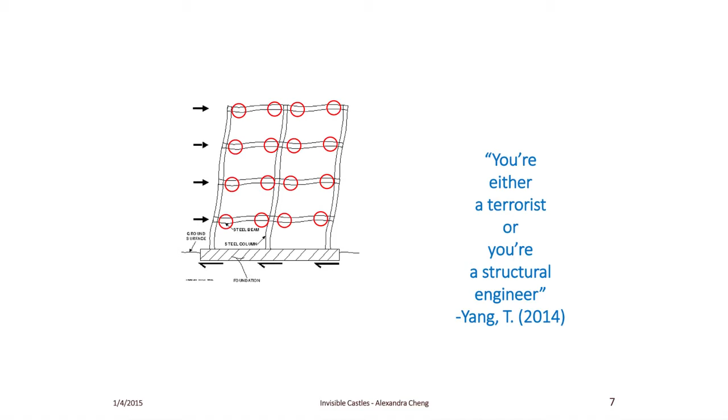So again, I say I usually try to make sure buildings don't fall down, but that's not actually what I do. I may or may not have written that. I actually design buildings to fall down, but at a very certain point. This is a professor of ours. He asked us to point out the weakest points in the structure, and we all pointed at the red circles, and he's like, good job, you're either a terrorist or a structural engineer. Because you have to design the building to be weak at certain locations.

And the reason why we do that, especially in the seismic zone, is because when the earthquake comes, that's quite a bit of force hitting so much mass. Or it's a lot of mass moving, so it's a lot of force. And you want the building to move just enough that it won't kill everyone, but not so much that it falls over. Because if it's too rigid, it crushes people, and if it's not rigid enough, it just kind of flops. But anyway, moving on.

When I was an undergrad, this is what I thought engineering was, which is a lot of equations trying to describe what's going on with a force. I kind of miss that because I could see it. Nowadays, I do more of this stuff, which is a lot of clicking on a screen and trying to make certain lines look like other lines and produce different numbers. And it's really odd to me because it's coming across now more as an art project in this sense. It's more visual. You're not yourself doing a lot of number work. You miss that. But again, I have an arts degree.

Then when I left architecture, I had a brief semester of going, what am I doing with my life? So I took engineering and art classes again. And I had to study for my advanced concrete design final. And I thought, oh, I have to do an art project for my final. Also, I might as well kill two birds with one stone. And so I did a fake concrete column out of boxes. And I did all the design calculations on the outside.

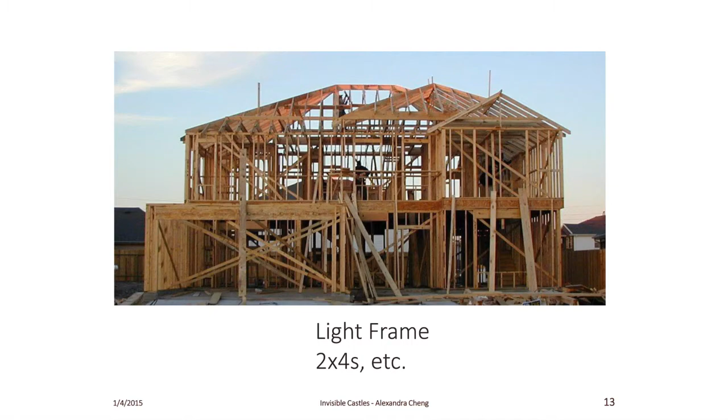And so when people ask what exactly I do, I say I'm a timber engineer. And usually when people think of timber engineering, they think of light frame housing, which is what most timber structures are in North America. These are all these little stick series, they're 2x4s, 2x6s, sometimes 2x10s. You may or may not have an engineered wood product in there, but they're going to be about this size, and I'll get to why they're only that size in a bit, but this is usually what people think of. This is not what I do.

There's also heavy frame, which is a good example. It's when you start to get a lot of Game of Thrones type sort of buildings. Green College itself is an example of heavy frame. That's when you're starting to get wood sections that are up to about 2 feet by 2 feet, say. They get pretty massive. But that's hard to do nowadays because it's hard to find trees of that quality that big. So usually you do see more light frame because it's easy to get little pieces like that. And you're seeing less and less of this because it is tougher to get sections that big. And usually when people do build like this, they want timber frame joinery, which is old-fashioned, it requires a lot of skill, and it takes a while, basically.

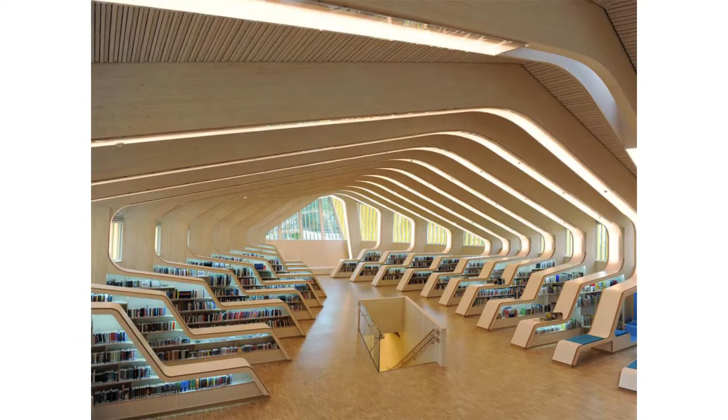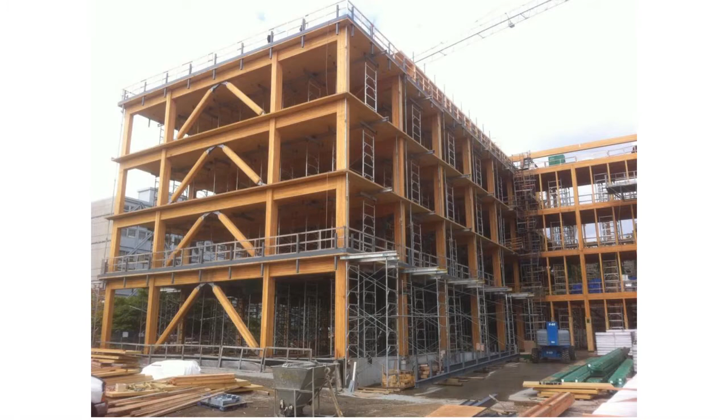This is mass timber. This is what I'm studying. All these curved arched ribs are going to be out of glulam, or nope, looks more like laminated veneer lumber. But you can shape them into interesting forms and carry huge amounts of load. And this is in the Earth Sciences building. That structure is timber members with steel connections, and it has a really nice back to it. It's starting to look more and more like a steel structure in its basic form. You have large members, and you've got cross-bracing for seismic loads.

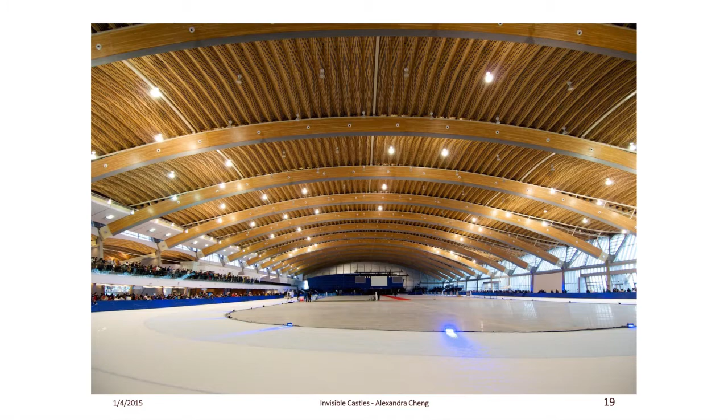And another good example is the Richmond Olympic Oval, which you may or may not have been to. I recommend going there because it is a very pretty structure. That's a 100-meter span. That is also a hybrid structure of timber and steel. And so what I'm doing is studying 3 different hybrid timber high-rises. They range from 30 stories to 40 stories. What I've got to do is take what the architects have proposed. These are all proposed by architects. And put them into a structural analysis program, see what kind of loads come out of it, and compare how much it costs to build them.

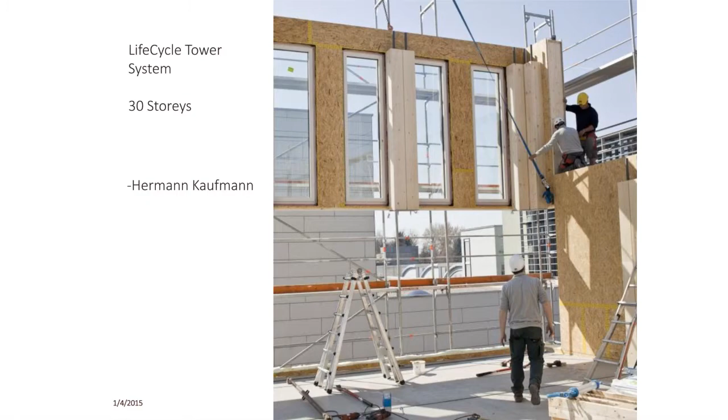Most of them rely on prefabrication, where you have the wall facades already assembled, you have your beams and columns more or less put together, and on-site you just screw them in together. And so compared to, say, a purely concrete structure, a mass timber high-rise will take about a day per floor. A concrete structure will take longer because you have to let the concrete set every time.

And so this is the closest we have to it. This is the Life Cycle Tower. It's in Austria. This one's 8 stories, but they think it can go to 30. Well, I'll see if that's possible or not. Probably is. The real reason why we haven't built any structures this tall is because, again, most people think of timber as light frame. It's often more expensive because concrete is just easier to get, steel is just easier to get. And there's not a lot of design guidelines because mass timber is unconventional.

All the connections you get to use in that system are unconventional through proprietary means, which means there aren't standard design guidelines on how to use them. And building codes are also a massive problem, and that's not without good reason. Mostly it's because of fire, which is understandable.

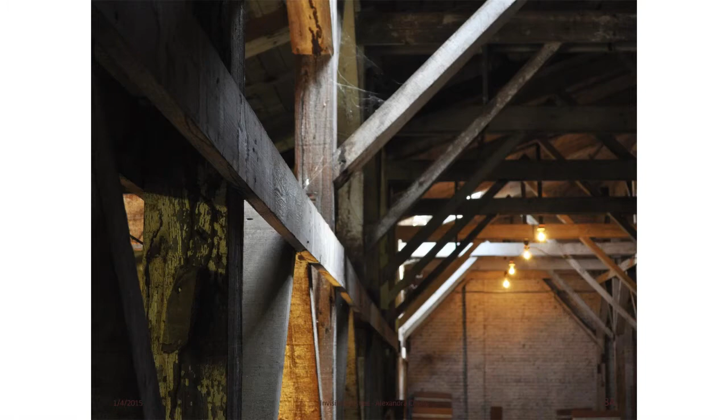Most of the fires started off in warehouses or barns again. There's no fire protection. It just wants to burn, basically. Nowadays we put fire retardant spray on most things, which helps. You can also put gypsum on the walls, which also counts as a fire barrier. And you also have drop ceilings themselves, which also provide a fire barrier. And of course we also have sprinklers. You can just see them in that structure there. Sprinklers are very important. I'll get to that in a second.

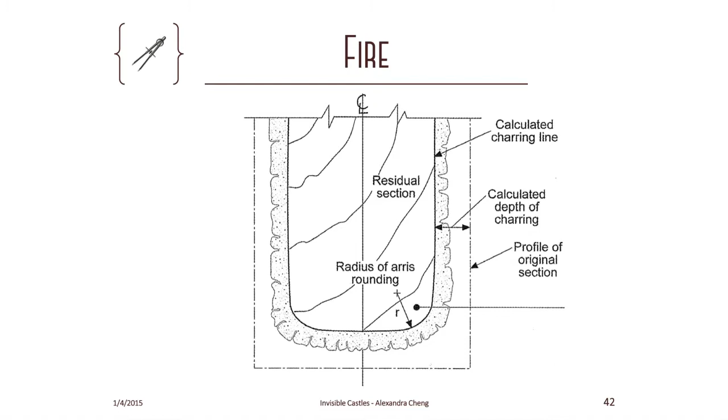At some point you have to rely on the members themselves. This is a diagram showing how wooden sections burn. It's important to note in this diagram that the outer section of course is burned away. You can see the charred area. The residual section is what is left, and that still has the same capacity as the normal member. And so what you do is you oversize these to provide you a little extra time so that as the section burns in, you still have a residual member to provide support. And so here's a nice little detail showing a wooden section that's gone through a fire test.

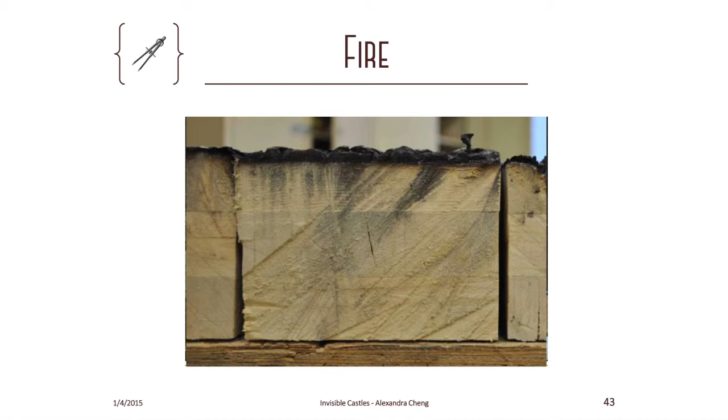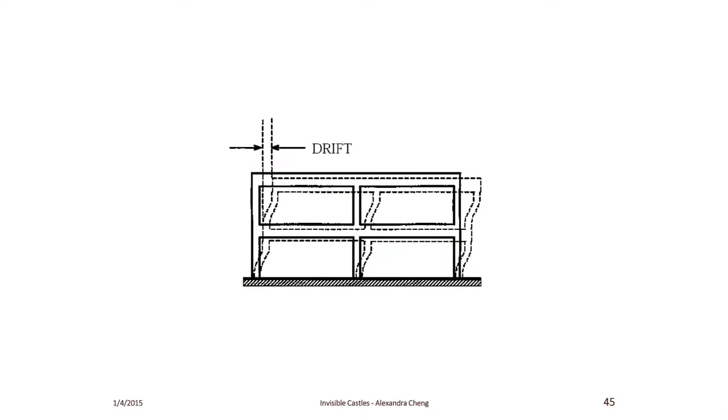There's some terrifying videos on YouTube of these things in action. There were screams. It's great.

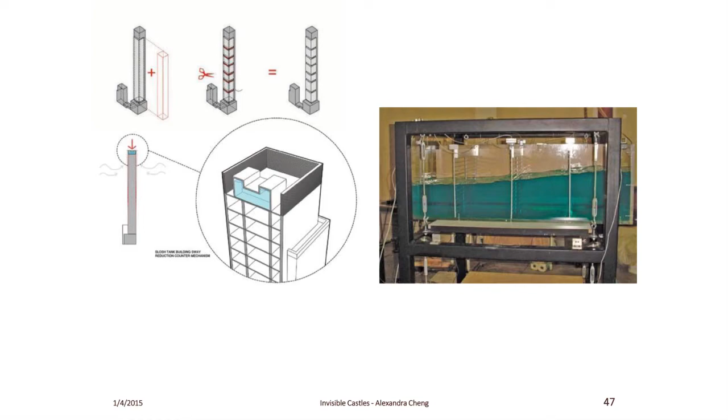I thought, well, there's different kinds of tuned mass dampers. This is a liquid tuned mass damper. I said, oh, what if we had that as a counterweight, and that would supply the sprinkler system? Because of course in an earthquake, which Vancouver has, and which caused the 1906 fires in San Francisco, your civil infrastructure kind of breaks down. Your fire trucks can't get through rubble. Your water systems might break. You have to rely on an in-house water system.

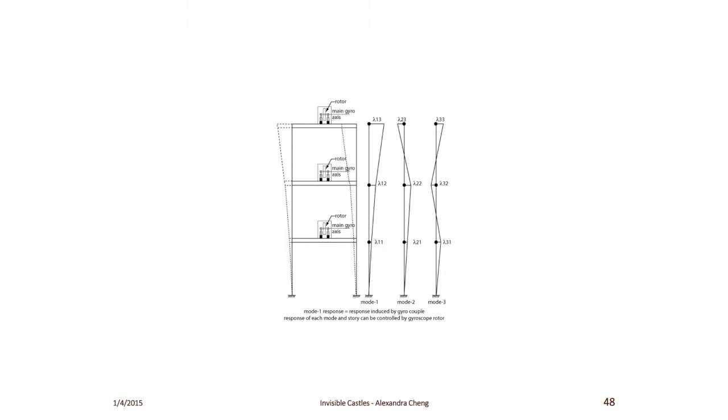And so it looks a little bit like this. If this doesn't scare you, I don't know what is. Well, this is kind of how we model how a building operates in an earthquake. It's balls and sticks. We get more advanced than that, but this is the basic concept.

I want to put in multiple tuned liquid column dampers, which sounds really fancy, but essentially these are U-shaped pipes with water in them, and you calibrate them to a certain frequency. And this way you can have several frequencies in the same building so that you can make sure that they don't overall actually contribute to the sway instead of dampening it. And you can locate them at different points in the building to optimize that.

So my project is to take the proposed high-rise structures and put these at half points or third points in the structure, see how much that extra load causes the connection design cost to go up, and then compare it that way.

Because the main thing we were told, at least in my department, is that the reason why we aren't building these is because it just costs too much. It costs maybe 3% more, maybe 5% more, but the contractor, the developer, won't do it because it just costs too much. But then again, you do get fancy structures like the Seattle Public Library. That wasn't cheap. And so my feeling is that if we can get architects to start specifying this and selling it, we'll see more of these kind of structures. So I say it's more of a cost versus attraction kind of balance.

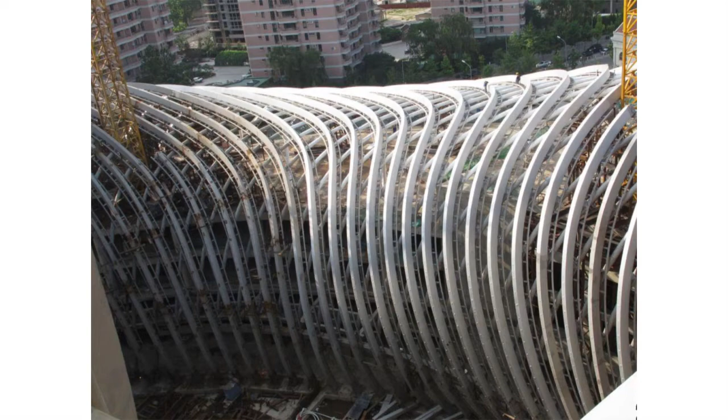Well, I'll be darned if architects don't use straight lines. This is a particularly cool thing, but holy crap. So how can you take this and put it into SAP? SAP doesn't like curves so much. You can kind of get curves out of it, but it really prefers things to be orthogonal. Well, how do we do this? Well, I thought, I'm going to have to look at what the architects use.

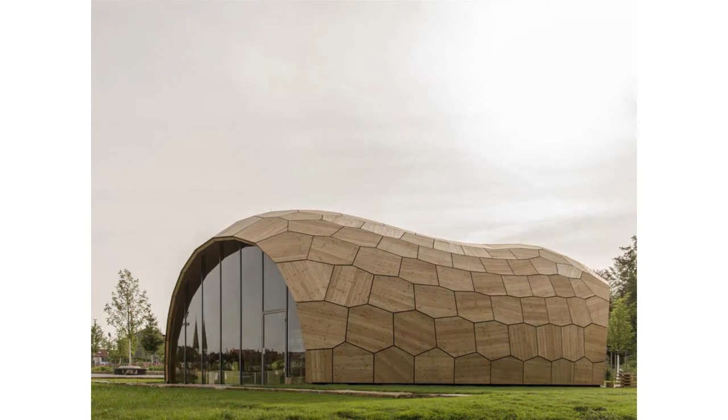This is a program I picked up in architecture, and you use generative algorithms, which is a fancy way of saying a mathematical function that builds a shape. It's very versatile. You can make it hook up with other programs. It depends on little plugins you can download online and stick into Grasshopper, which are all free, but you just have to know how to use them.

They can do geometric simulations, they can do environmental simulations, they can figure out how much energy you're using, they can simulate daylight, they can simulate wind. They have optimization plugins, so you can tune which parts of the functions you want to encourage and which ones you don't. You can communicate with Excel, and you can also have a software interaction with other kinds of software, which is important, because then we can hook our architecture program up with structural analysis programs that we've been using.

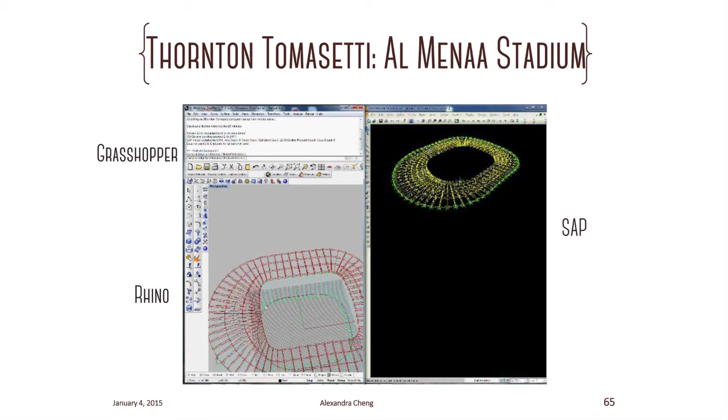Whoa. But this is what I eventually want to do. This is an example of a video that Thornton Tomasetti, an engineering firm, did. They now use this kind of software interaction to design all their structures. And this is how they designed the Al Menaa Stadium in Iraq. Let me see if it needs to go. Or maybe not. Oh, there we go.

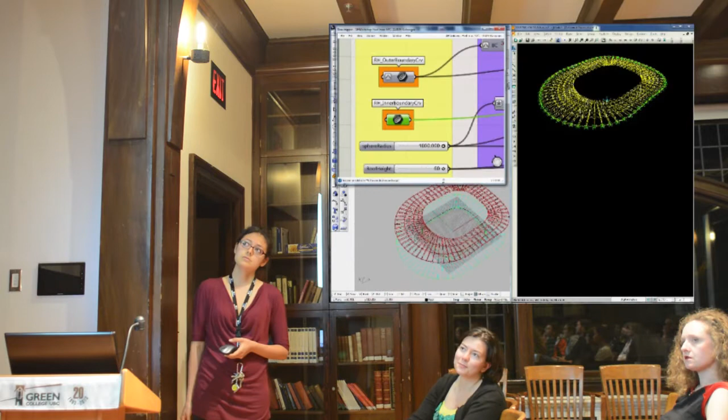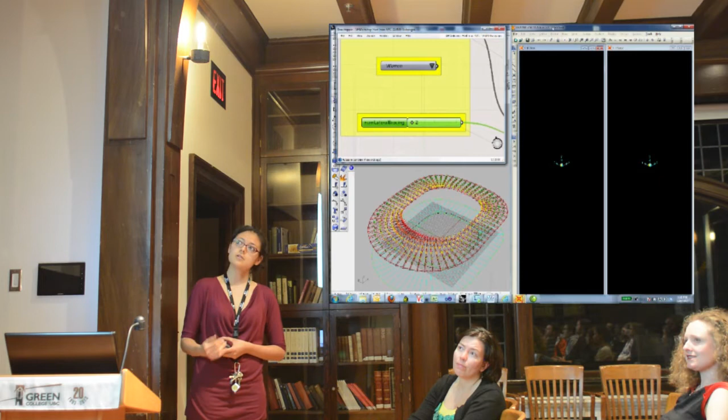All your geometry is in Rhino. And that's hooked up to Grasshopper, where it optimizes things. And that's fed into SAP, which figures out all the loads and returns it back to Grasshopper, which then calibrates everything again in response and does iterations. And this is how they figure out the best forms for them, according to either cost or load demands. This is for deflection. The first time I saw that, I was like, oh my god, that'll save me so much time. Anyway.

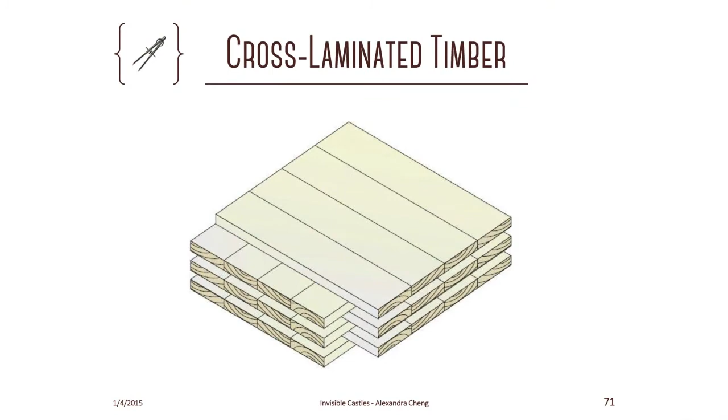And so it's a bit tricky because you have to look at the material. Like, well, what are we working with? We're working with cross-laminated timber, which is what all the floors in the Earth Sciences building are made out of. These are your 2x sections, and they're put in little stacks, and these are layered in alternating orientations, and they are glued the hell out of each other, and that's it. It's a solid, huge piece of timber. You can't grow trees that are 3 meters by 12 meters. They can go up to 3 meters by 12 meters, solid timber. They can be up to about 40 centimeters thick. It's heavy stuff.

It's nice in that it has strength in both directions, and that's important because it's timber. I like to describe it as a bundle of straws. You can press down on the ends of the straws and it's fairly strong, but if you go through the middle, they just kind of crunch. So when you have a section like this, you've got timber running in both directions, you've got strength in both directions. But you might notice that there's not actually the same number of layers in each direction. So when you calculate the strength of that panel, it gets a little complex, depending on which way the load is coming from.

And the tricky thing is that the architects won't give me a shape. I don't know about you, but the basic way that engineering works is that you get a shape of some kind with dimensions from the architects, and then you have an idea of how much snow is going to sit on that, and then you divide up the area into little tributary areas, and you say, okay, that much load is going onto that member, but you have to have dimensions. There's no dimensions. That's really hard.

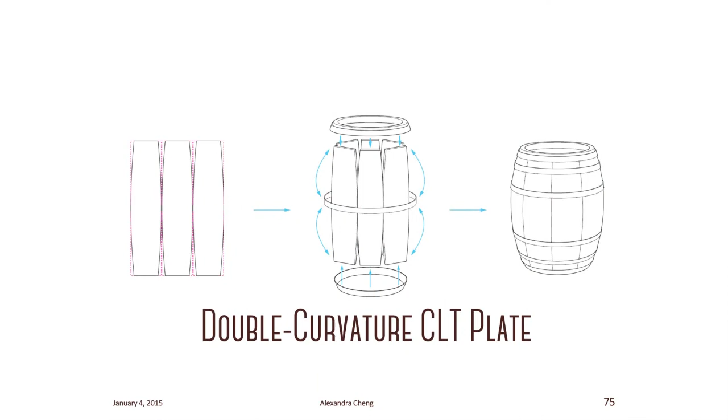We also want to do double curvature, just like concrete, which is nuts because no one does that. They couldn't figure it out for a while. They were banging their heads against the wall, and I said, look, let's look at a barrel. A barrel has double curvature, and we'll just make really huge barrels.

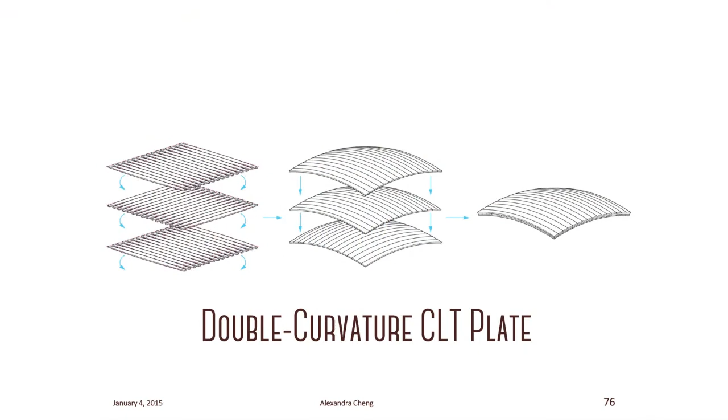So what they do is, to make a barrel, you take your 2x and you curve the edges so that when you do bend it into place, it has a curve this way and a curve the other way, and different curvatures. So they are trying that. They're making a double curvature CLT plate with the alternating orientations, and this is the mold formwork for it. And that is as far as it has gotten, because they haven't gotten their stuff together since then.

But we're getting there. But on my end, I want to make sure I'm designing this right. I want to know what the shell forces are, because shell forces are tricky. Well, there is a nice book about this called Shell Structures for Architecture. But I read through that, and all the chapters written by the engineers were essentially, whoa, this stuff is crazy. Maybe it's right. We're not really sure. Most of them were just saying, this is really complicated stuff. I'm like, okay, it's great.

So what I thought about, okay, when you design the panel as a floor panel, the whole thing is a shell, but the design procedure assumes it to be a beam. So I said, okay, we'll just assume that these are beams and design for the weakest direction and go from there, and that should be a good assumption. So I've been sticking these things through Rhino and Grasshopper into SAP, and I get a line, yay! So this is coming along. It's tricky because SAP likes concrete and steel, and I'm not using concrete and steel, but we're working on that.

The double curvature plate. Can we actually get plate action out of that? Well, that's coming along. I do get deflections out of this now, so that's exciting. This only took 3-4 months to figure out, which is a little weird coming from an arts background, because if I actually just wanted to make a picture like that, you would just sit down for 2 hours and just draw it. Instead, you go into engineering and you spend 4 months to make the same thing. It means more, but a little odd.

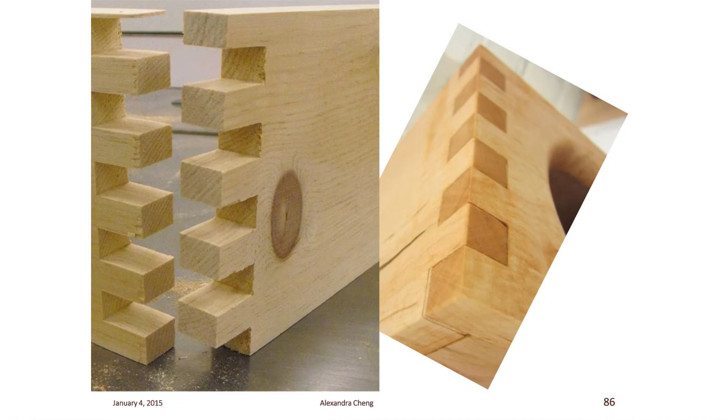So I've had to learn Python and develop my own components for Grasshopper. And then when it comes to the connections in between them, we've been doing a lot of screws. I prefer self-tapping screws because people make those, but my architects want to use entirely wooden structures, which is a little aggravating. But I said, well, okay, we'll use finger joints, just like in furniture. It'll look kind of like this in the CLT plate. We'll cut off the edges, but that shows it pretty well. And it's hard to make that with all those weird angles. Especially with timber engineering, you have to be exact, very, very precise.

So we're going to use robots to cut them. We're getting access to that. So you have to go back into the Grasshopper code and develop components that take your geometry and translate it into G code for the robot to understand. That is a 5-axis robot. That's very expensive. And eventually I want to be able to make CLT panels with this kind of connection and bond it with adhesive, because the adhesive itself is actually stronger than the wood. This way I can get a moment connection so I can do this, but bigger.

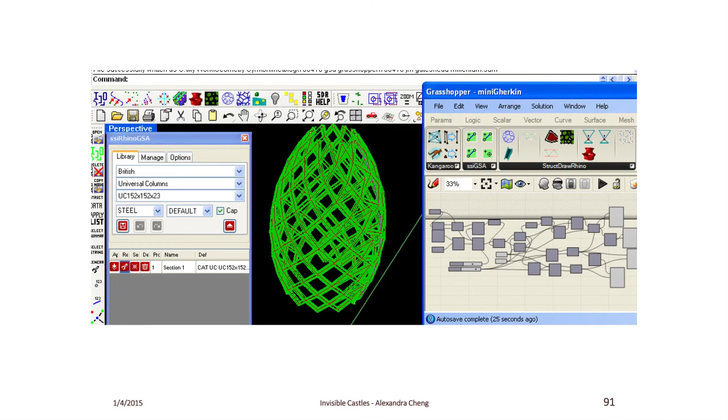And in the meantime, after that, I would like to see CLT panels applied to structures which are much, much larger, different orientations. And I'm sorry, I don't have any Batman drawings for you today.